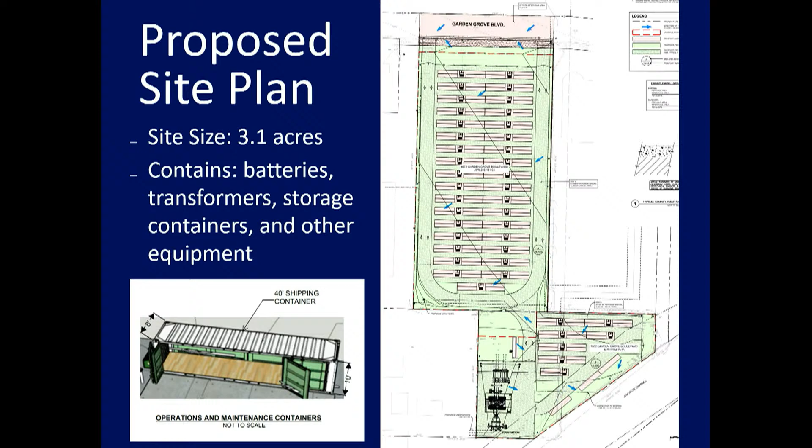The applicant does not propose to construct any building structures, therefore the site is not required to provide any parking. The applicant stated in their project description that the facility would be unmanned and primarily operated remotely. There is 1 existing parking stall on the site to support the existing towing operator, and the applicant proposes to maintain that existing parking stall to accommodate any future workers visiting the site to conduct routine maintenance.

Here are a few excerpts from the applicant's materials. The majority of the site will be used to install 172 Tesla battery energy storage enclosures, which are illustrated here. The batteries are about 9.5 feet tall, and they would be primarily screened from view by proposed and existing walls and fencing. According to the applicant's CEQA memo, provided as attachment 6 to the staff report, these batteries are fully certified and routinely tested to ensure compliance with health and safety standards.

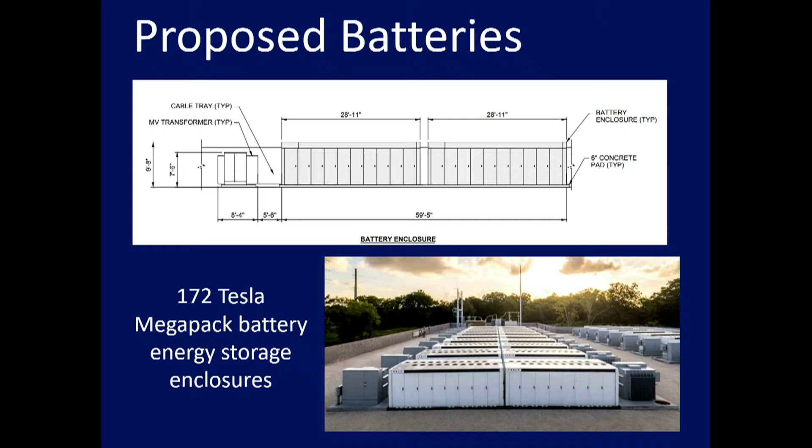Conditions of approval are also included, requiring the batteries to be reviewed and approved by the Orange County Fire Authority prior to building permit issuance.

Along the southern corner of the project site is the proposed substation, which would connect to the existing SCE substation. The project substation includes equipment ranging in height from 18 feet to 29 feet, detailed on this slide. This proposed equipment will not be screened, and it will be generally visible outside of the project site boundaries. The equipment shares a similar appearance to the equipment currently found at the SCE substation.

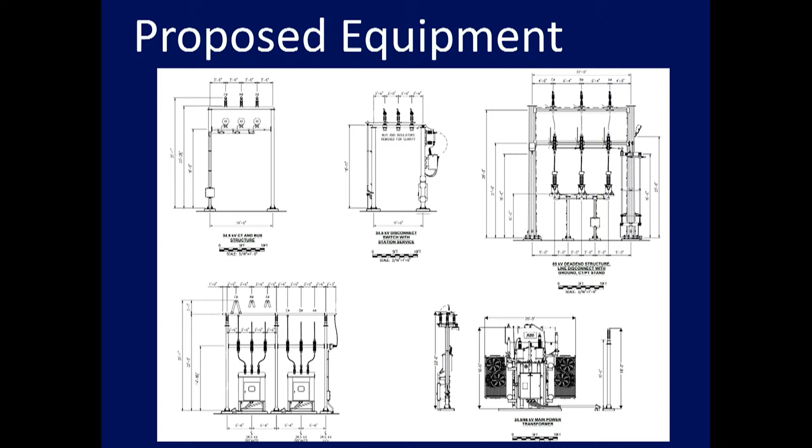Overall, staff found that the proposed project meets the required findings to support approval of the requested CUP and development review.

The proposed use is most similar to a public utility facility, which is a conditionally permitted use in all commercial zones, subject to Planning Commission approval of a CUP. Because the applicant does not propose to construct any building structures, there are very few development standards applicable to the project. The applicant proposes several improvements that would increase the value of the property.

Both parcels are designated as regional commercial per the general plan, and the applicant has provided various technical reports to support the project, including a fiscal revenue analysis. Staff recommends including a condition of approval to ensure that the city receives the projected one-time tax revenue from the purchase of the equipment.

The next two slides will discuss the perimeter fences and walls. Overall, staff is very supportive of the applicant's proposal to secure the site and upgrade the perimeter walls and fences. The two images at the top illustrate the proposed wrought iron swing gate and fence to be installed along the street frontage. These improvements, along with the landscaping, will enhance the overall aesthetics from Garden Grove Boulevard. Staff is also supportive of the new block wall to be installed, which is 8 feet tall, with a 1-foot tall climbing deterrent at the top. However, staff is not supportive of maintaining any chain link fencing at the site.

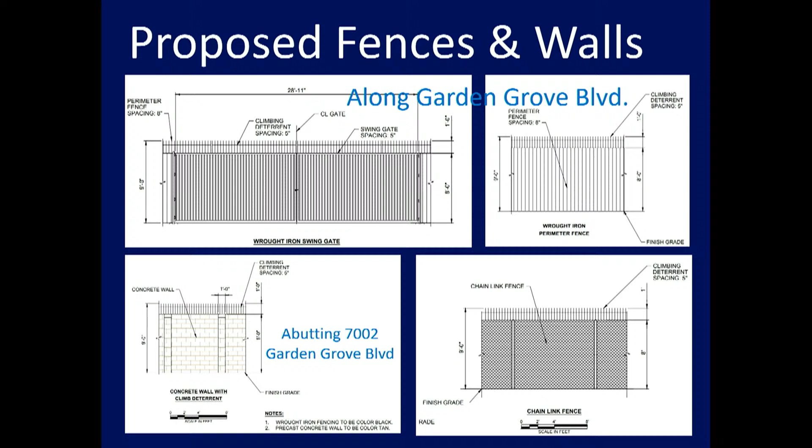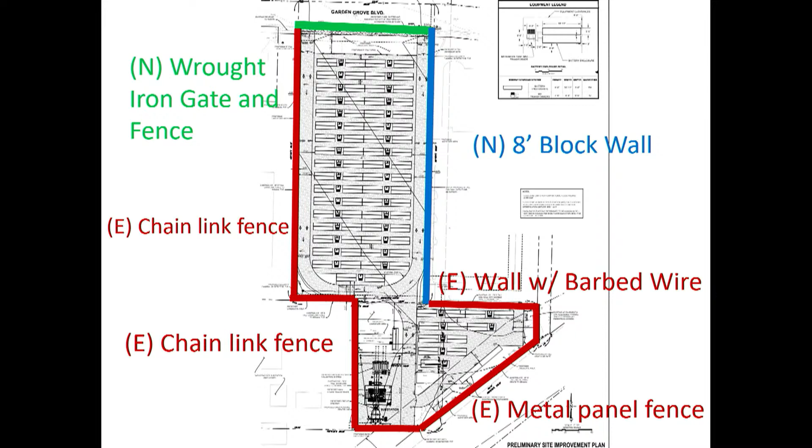This exhibit illustrates the combination of materials that would make up the site boundaries. Anything in red represents existing fence materials that the applicant proposes to maintain. The green line, which is a little bit cut off at the top, represents the new wrought iron fence material, and the blue line represents the new block wall. The combination of new and existing walls creates somewhat of a hodgepodge appearance, so staff recommends including a condition of approval requiring the perimeter wall improvements to be extended along the entirety of the site boundaries. This condition would ensure that existing materials such as barbed wire and chain link fencing would be removed from the site.

As noted at the beginning of staff's presentation, the project site is surrounded by a mixture of uses, including commercial, industrial, and residential uses, along with an existing public utility. As part of the application review, staff evaluated the land use compatibility of the project with adjacent residential uses. The proposed battery energy storage system is located approximately 100 feet away from the nearest residential property line, and the project site is separated by an existing flood control channel.

The applicant is also requesting a zoning map amendment to remove the PD overlay from the smaller parcel, shown in purple. This PD overlay was originally intended to allow for mixed-use development. However, over the last few decades, this overlay district has rarely been used in the city, and in more recent years it's been replaced by the newer mixed-use zoning districts. Staff is supportive of the zoning map amendment, as the parcel is not suitable for large-scale development as envisioned by the PD overlay. This zoning map amendment is not required to establish the proposed utility facility; however, the applicant wishes to clean up the zoning map by removing the PD overlay to ensure the zoning more accurately reflects the site's intended use and surrounding context.

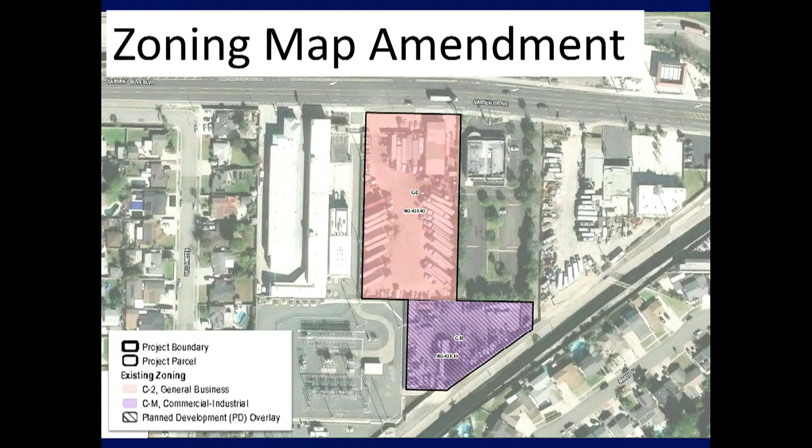Staff completed an environmental assessment and determined the project is categorically exempt from CEQA as it qualifies for a Class 32 exemption for infill developments. The applicant's consultant prepared a technical analysis, provided as Attachment 6, evaluating environmental impacts related to various topic areas. The analysis concluded that the project is categorically exempt from further CEQA review because it would not result in significant effects related to traffic, air quality, water quality, utilities, public services, fire safety, aesthetics, and so forth.

In accordance with the Westminster Municipal Code, public hearing notices were mailed to property owners and occupants within a 500-foot radius of the project site boundaries. Notices were also posted at the project site, on the city's website, and on public bulletin boards.

Staff received several public inquiries requesting additional information on the project. The written public comments that were submitted to staff prior to publication of the agenda packet are attached to the staff report. No additional written comments have been received to date.

In conclusion, the project complies with the zoning code, is consistent with the general plan policies, would not create impacts adversely affecting the public health and safety, and would provide benefits to the public related to visual site enhancements and fiscal revenue. Staff recommends the Planning Commission take two separate actions: first, adopting Resolution 2024-12, approving the CUP and development review application; and then a separate resolution, 2024-13, recommending that the City Council approve the zoning map amendment, since that is a legislative action that would ultimately require City Council approval.

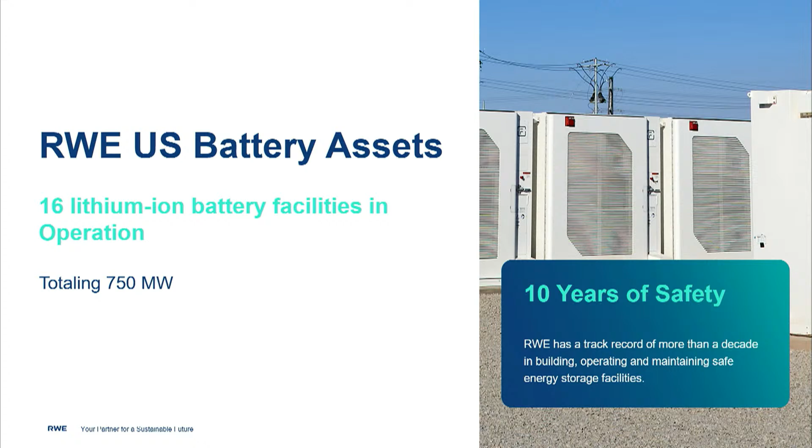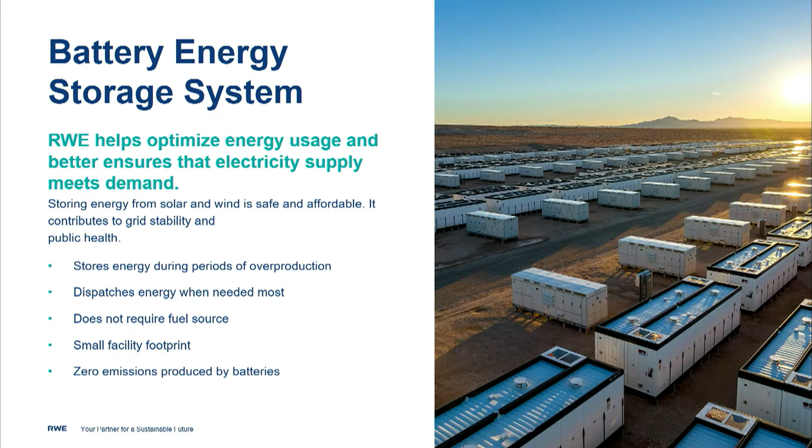So here in the United States, RWE owns and operates 16 lithium-ion battery facilities. We've been building them for the past 10 years and have a lot of historical knowledge about how to do it right. Our energy facilities total 750 megawatts. So here's a bit about energy storage systems. The general idea is that we can store energy during periods of overproduction and then dispatch that energy when we need it most. It doesn't require a fuel source, doesn't have any moving parts, requires a very small facility footprint, and there's zero emissions. It's one of the few energy producing facilities that you can build within an urban environment.

There's a particular local need here in Westminster for battery storage. There are 3 natural gas-fired plants in the region that are seawater cooled. They're very old, and the region hates them. People don't like looking at these facilities at our beaches. There's one in Long Beach, Huntington Beach, and Oxnard. They're slated to be shuttered in 2026, which is going to create a capacity shortfall. We can have battery storage here in our population centers and add to the reliability of our system without having transmission lines crossing our skies.

The Westminster Reliability Project is a 110 megawatt lithium-ion storage facility capable of powering 82,500 homes for a duration of 4 hours at a time.

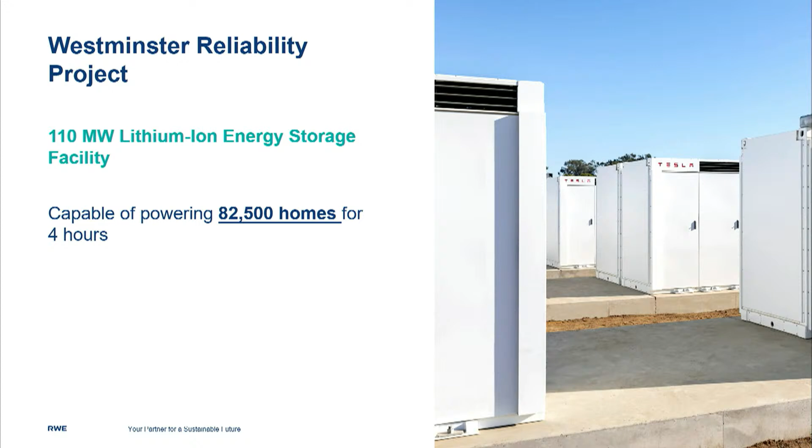The site's located right next to the SCE substation. What's nice is that our substation will be maybe a third of the size of the SCE substation, and the connection is going to be underground. So the substation will be as low profile as possible, and the vast majority of the 3 acres is going to be a maximum of 9.5 feet tall. It's about as low profile a development as you could hope for—not even a single story residence is that short.

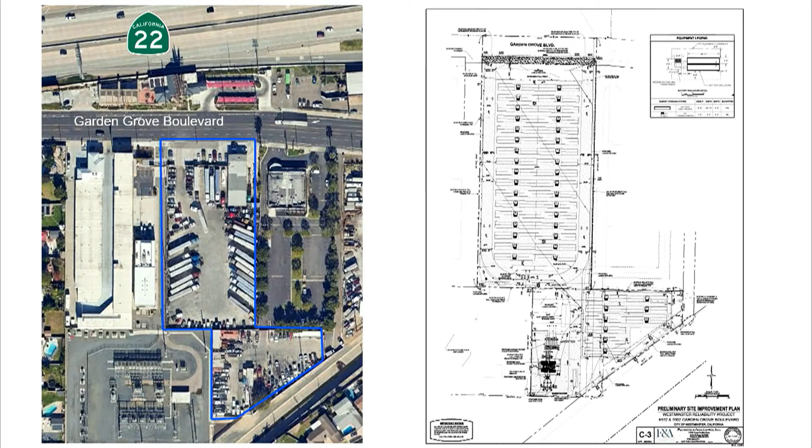We're located right next to the Library Gentlemen's Club and a storage facility, as noted earlier, so it's a pretty industrial area. The 22 freeway is right there to the north. You can see the site plan right next to it—it's basically just going to be rows of batteries, and should be a really clean and quiet, peaceful development.

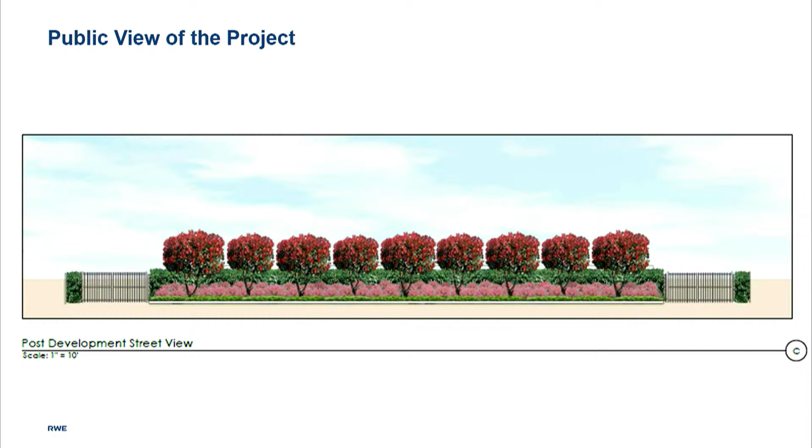This is what it'll look like when you drive past it on Garden Grove Boulevard.

Here's a note on safety. We've been working arm in arm with Orange County Fire Authority since we submitted our CUP application. We are required to get their approval on a fire master plan, which we will work in close coordination with them to obtain, and they're also going to sign off on our building permit. This will ensure the fire department is satisfied with our design, and that this facility is designed to the safest extent possible based on our most modern understanding of how to do this right.

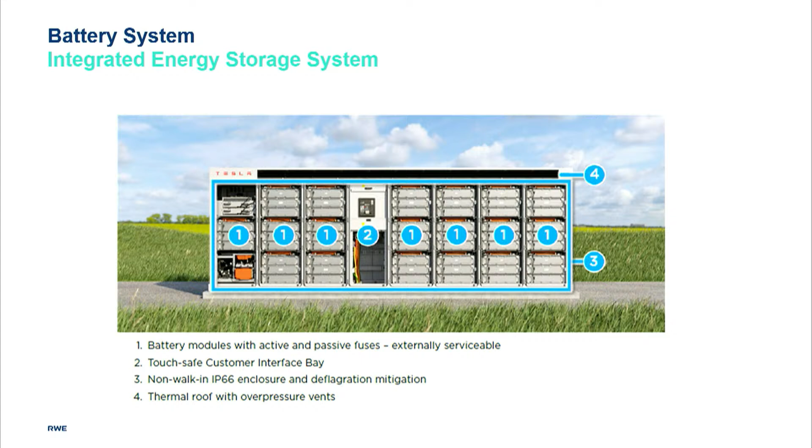The Tesla Megapack has a ventilation system to make sure pressure never builds up, and an internal system to make sure potential flammable gases do not build up. So it's a state-of-the-art design in terms of safety and energy efficiency.

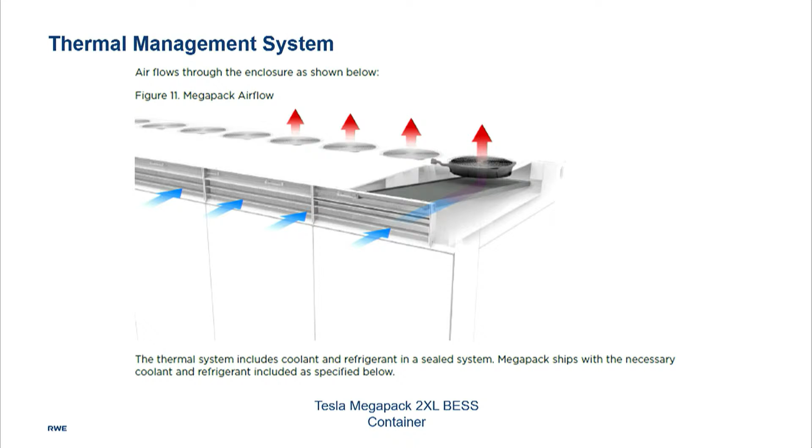The Tesla Megapack complies with all major installation codes for energy storage systems. Most importantly, it's going to be continuously monitored by our operations staff, which will work in the region. It will be monitored 24/7. We're going to monitor the voltage, state of charge, and thermal detection. If we notice any anomalies, we can de-energize the site, and if need be, implement our fire master plan, call the fire department, and work hand in hand with them to mitigate an incident.

I will note that over the 10 years of RWE operating its various battery systems, we have not had a single safety incident at any of our facilities. The chances of there being a significant event is less than 0.1%.

There are some serious land use benefits to consider for the community. As I mentioned before, the Megapacks are only 9.5 feet tall. It'll keep the sky open, and you'll be able to see right over the tops of them for the 20-year lifespan of the project. It'll prevent a very large structure from being constructed there that could bring in traffic, noise, and pollution. It'll be very quiet, and it'll be zero emissions.